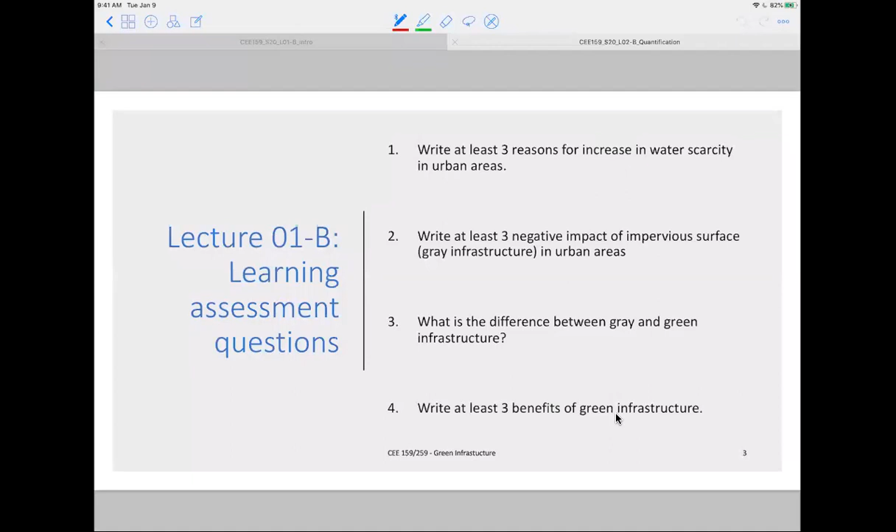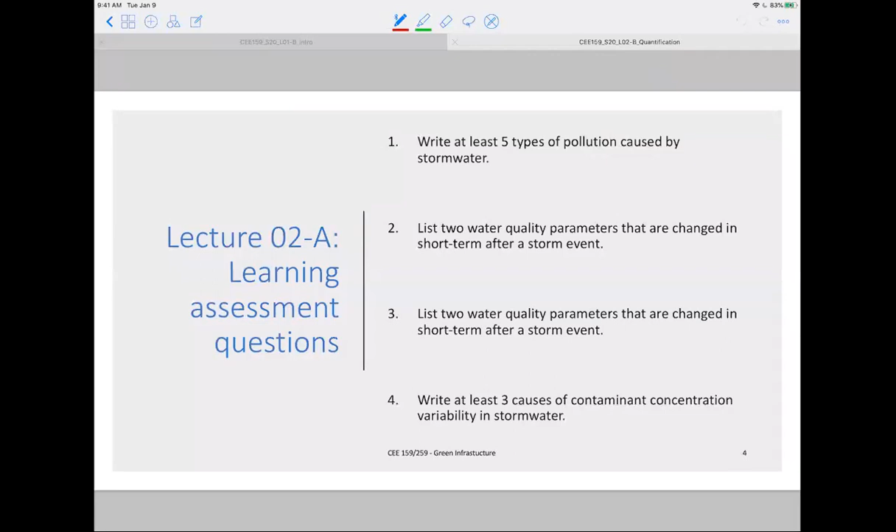So this is the objective of this particular hour of lectures. The first objective is about environmental regulations. Green infrastructures are designed because they have to be designed - if you give agencies a choice of whether to have green infrastructure or not, nobody will choose it because it costs extra money, even though it has a lot of positive impact. So many municipal agencies won't enforce green infrastructure unless there are regulations.

We'll learn about the different regulations that force municipalities or agencies to have green infrastructure in those regions. Then the next questions are all about consulting companies - if you start working, these are the questions they'll ask, the questions you should know. First, maybe in your first job, your task is to collect stormwater, so you should know how to collect stormwater.

You should know different side effects in the sense of what you should not do, what you should do when you collect stormwater samples. We'll learn that in these lectures.

Another part of stormwater monitoring is when you should take samples. What do you expect? At what time should the concentration be high? Concentration of contaminants in stormwater can vary very widely depending on whether you take samples at the beginning or end of storm events. The concentration can vary by orders of magnitude. So you should know at what point and location you should collect samples, and we'll learn that today.

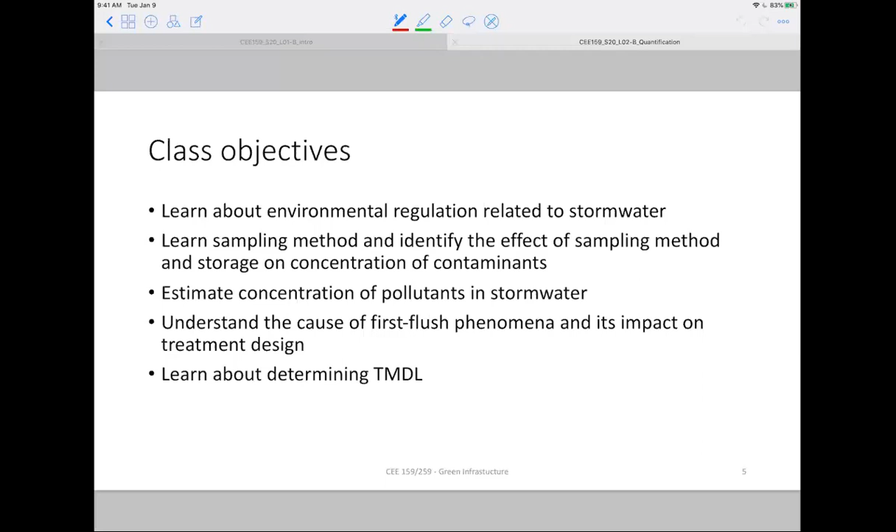These are the four questions you should think of when you listen to these lectures, and you should be able to answer them. First, what are the different regulations that affect stormwater management and how are they enforced? Who enforces those regulations—is it a federal agency, a state agency, or a local municipality? You should be able to answer that in a couple of slides.

Second, learn about sampling methods and handling, particularly what precautions you should take. The third is about the cause and importance of first flush phenomena. At the end, you have to measure the concentrations and how to quantify that—that quantitative part is the last question.

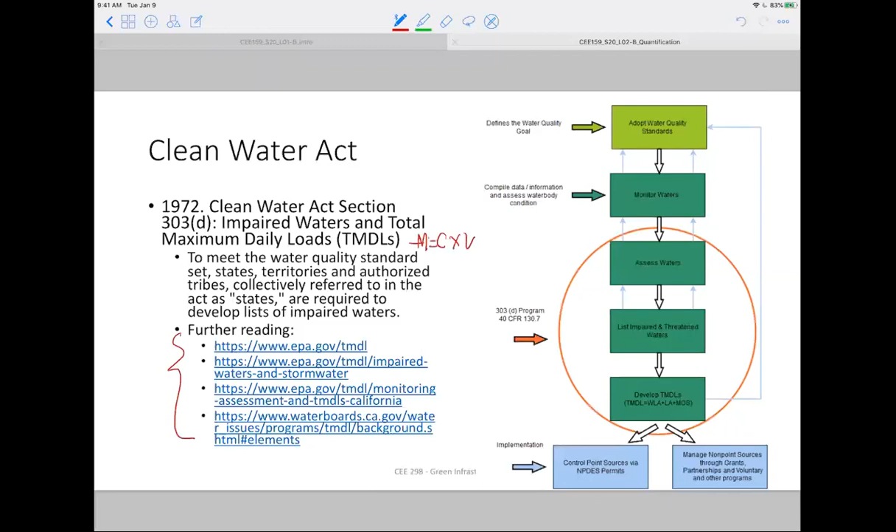Again, TMDL means what concentration is permitted. Even though it's a mass term, there is also a concentration term, based on acute toxicity—because if you discharge very quickly at very high concentration, that might be highly toxic to some aquatic organisms. So there is also a concentration term. But if you have a concentration problem, you can always dilute it and discharge it. There you are—that's the regulations.

The TMDL concentration varies based on water bodies because TMDL is related to the intended water use. For instance, if a lake is used for drinking water, the permit has to be more strict because the pollutant concentration has to be very small. But if that lake water is not used for drinking water, the TMDL will be much higher, meaning you're permitted to pollute a little bit more. So this TMDL is determined by end use; there is no single TMDL for every lake.

If you think of the LA River, there is a TMDL for it because those are based on what that water is being used for. That water is dumped into the bay that goes to the Los Angeles harbor, so those limits are based on the toxic effect in those regions. Same thing for a wetland, you will also have a different TMDL.

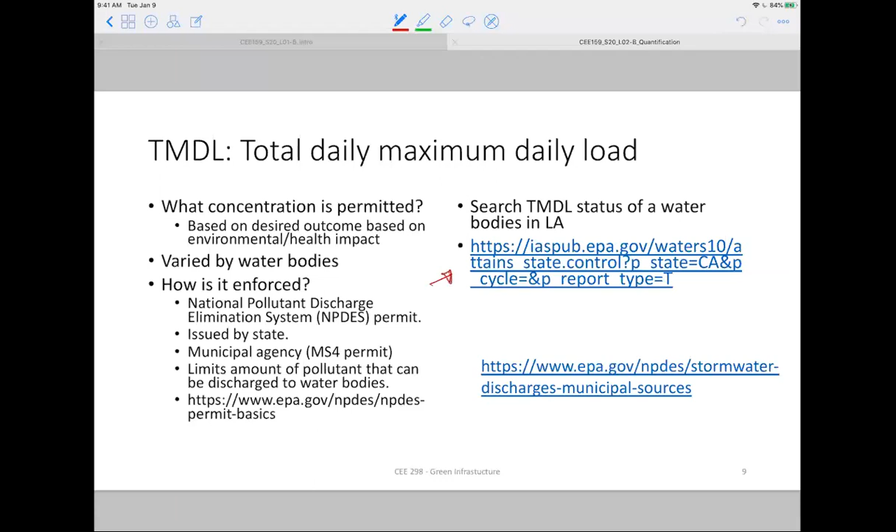And there are also local ordinances. For instance, LA has two stormwater ordinances, one from 1998, another from 2011. That's based on the low impact development ordinance, meaning which agencies should develop their property or include low impact development in their property.

For instance, think of buying a 4,000 square foot land and designing it a certain way. But when you design that, you might create lots of impervious surface that will pollute the river or water bodies. So the municipality or LA County can say you cannot keep the entire 4,000 square feet as impervious surface; you have to have some kind of green infrastructure to manage the stormwater on your property. That ordinance is based on the 2011 ordinance.

Again, we also have a stormwater ordinance from 1998. That's basically about how much discharge you can have from a particular site.

More recently, in 2018, this is very particular to LA County: Measure W, which is basically a tax system. That tax is called a parcel tax, meaning if you own a property with a certain amount of impervious surface, you pay a certain amount of tax per year, that's 2.5 cents per square foot of impervious surface per year.

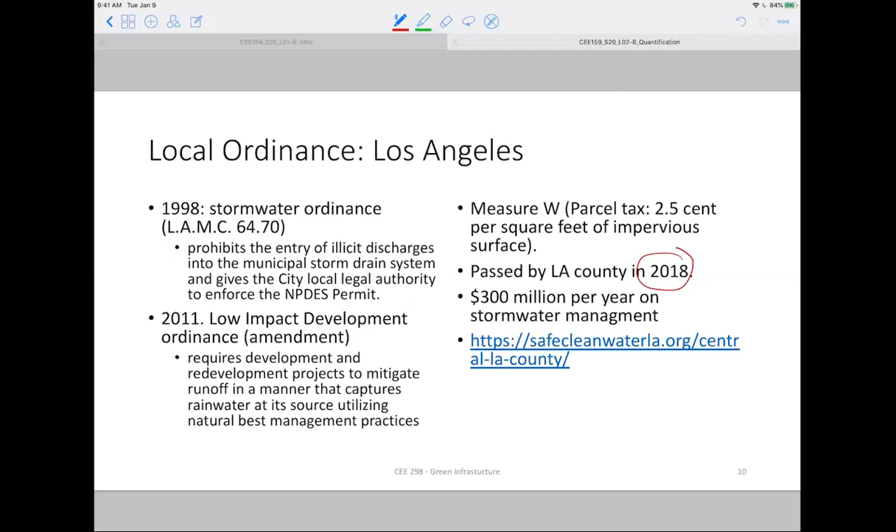Then there are many local regulations, as you see, I've provided some of the other ordinances.

Yes, I have a question. Yes.

So you said something about LA County having certain regulations and standards one needs to meet in terms of having pervious surfaces. So what's the minimum standard they need to meet? I guess in a way I'm trying to ask is if there's still a lot of runoff being generated during rains.

Are you asking about the volume or the concentration of pollutants? Just the volume, and also the kind of concentration of pollutants which have been established.

So I guess there is no minimum in the sense, because that's based on TMDL, where that stormwater is getting into.

There is a minimum drinking water quality standard. For instance, for drinking water or surface water, you need to have this much maximum concentration. Those are related to drinking water and enforced in a certain way under the Drinking Water Act, and those are also the same for stormwater.

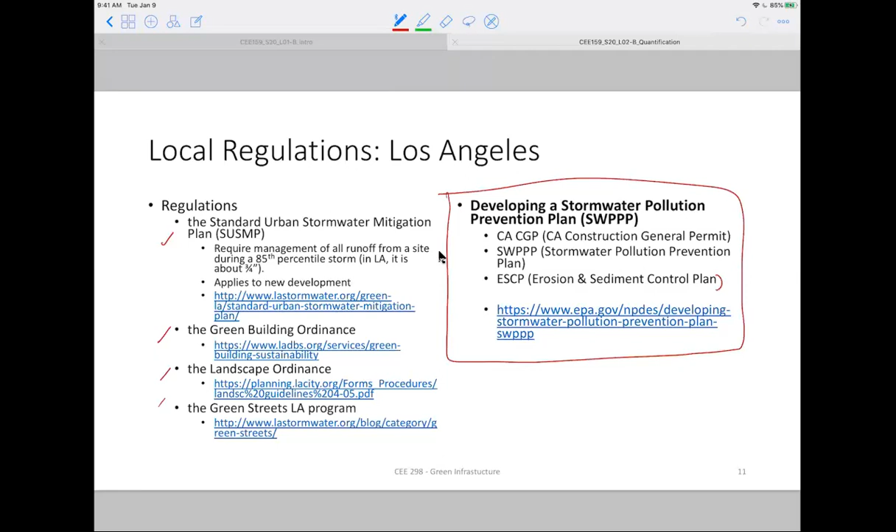The first thing in your job, imagine you got an engineering job in a stormwater consulting agency or industry. The first thing they will ask you is to go and collect stormwater samples at specific locations. There's a specific way you collect samples, and you have to make lots of decisions, which is what you're going to learn in a couple of slides.

When you're going for monitoring, you're looking for all these different pollutants — 8 pollutants I mentioned, but there are many other parameters you'll measure. So that means each parameter can be affected based on how you sample it.

For instance, think of sediments. To capture sediments, you take stormwater in a bucket and collect it, and keep it for, let's say, 2 days. You know that sediment can settle, which means if you sample from the top surface versus the bottom, you'll have very different concentrations.

That's why it's very important to know how you collect a sample, how it becomes representative, and how you store and analyze it. Monitoring is the first priority, because if you don't monitor, you don't know the problem. If you don't know the problem, you don't know what to design for, why you're designing these green infrastructures. There are many types of green infrastructure, and the design has to be very different based on what pollutants you are targeting to remove.

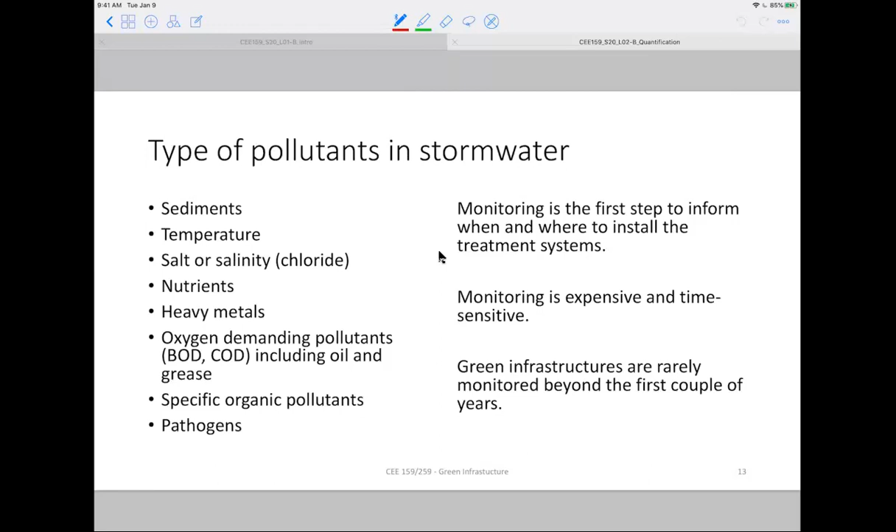I want to mention that concentration can vary widely. It's event-based, meaning based on what time, what kind of event — whether it's a 2-hour rainfall or a 1-hour rainfall, the concentration can vary. Even within the events, they can vary a lot, so it's very important to know what time you have to take samples. These are the challenges of concentration determination.

Challenges: first is unpredictability, meaning the concentration you expect at any time will vary widely. That means you don't know whether the sample you collected is representative of the actual concentration. It also depends on the local climate — if you have a very heavy rainfall, it will dilute a lot, meaning the concentration can vary quickly.

Again, concentration depends on the location. These pollutants accumulate on the surface for a period of time, so depending on where you collect the sample, the concentration can vary widely.

There are also many types of pollutants, and for each type there may be a specific strategy. For instance, if collecting for nutrients, what kind of sample container should you use? If collecting for pathogens and you use a sampler that already has pathogens, you're influencing the results. So how do you clean the sampler? All these factors influence these decisions.

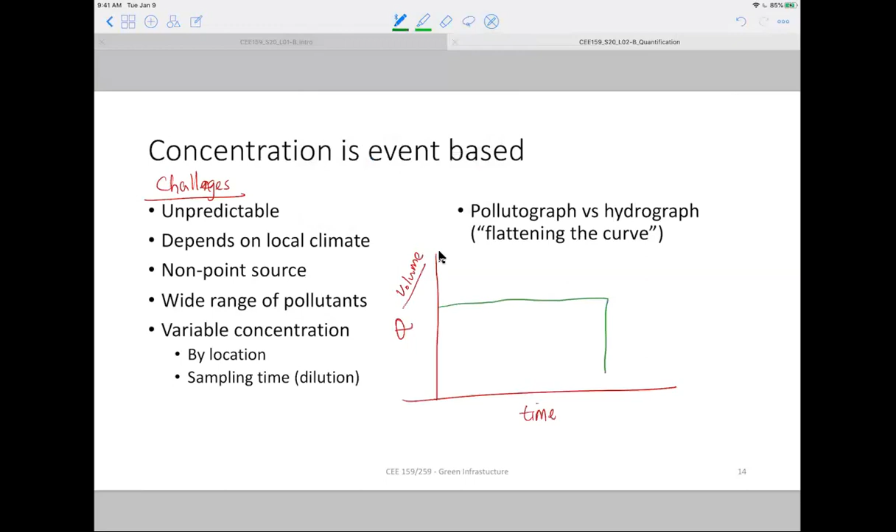This is time. Imagine the rainfall happens, and for simplicity I'll write the rainfall start and assume the same rainfall intensity until it stops. So this is rainfall intensity.

Now imagine this is the watershed, and you have rainfall here, all over at the same intensity, and you are collecting stormwater here—this is your sampling location. All that storm will drain into that particular location. It takes some time, so you can expect the discharge will initially be very small.

As it moves, it will continue to increase until the rainfall stops, and then it will start to decrease. It's not necessary that this coincides exactly with the peak discharge point—it depends on the size of the catchment area. But the point is, this is your peak discharge.

Imagine your pipeline and system are designed to hold this much water—this is the capacity of your municipal system to discharge stormwater. That means after this point, you will start having flooding. That's what we call the flattening curve.

That means if you have green infrastructure, you reduce that peak discharge. So this is without green infrastructure, but if you do it with green infrastructure, using a different line, this peak will be a lot less—so it will always be less than the capacity. This is with green infrastructure.

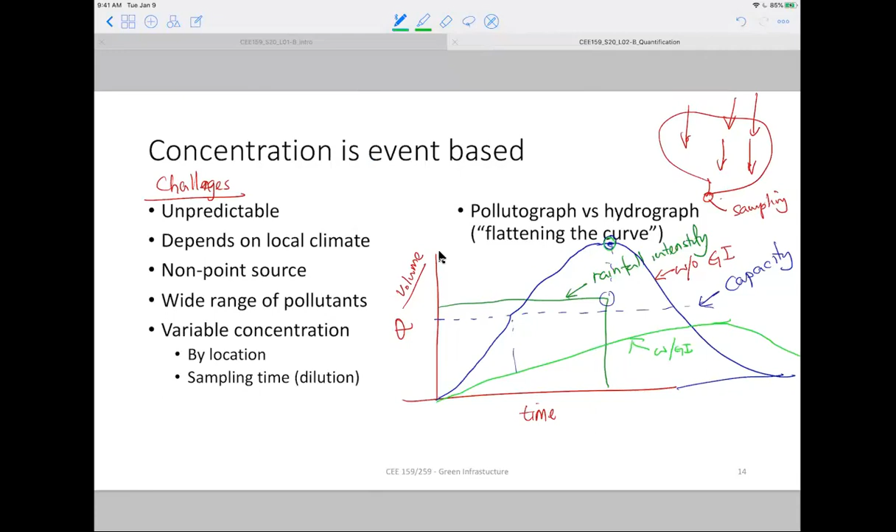There is no constant input of pollutants—it's all there to begin with, and everything can be washed off quickly. So you can expect that the water that comes very early is where you can expect very high pollutant concentrations. If you take water samples and start measuring concentration of pollutants, you might expect something like this.

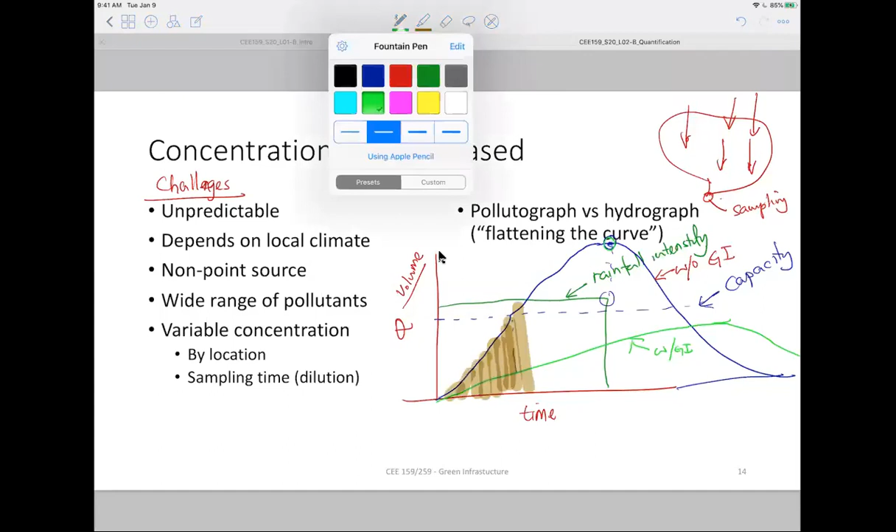We call this the pollutograph—the concentration of pollutant over time. And this is called the hydrograph, the amount of water discharged at a point over time, called that because it's related to the amount of water.

So there's one question: at what point do you expect high pollutant concentrations? You can expect that before the peak discharge—that's the quiz question, that could be one particular quiz question. What you learn here is that pollutant concentration always tends to come before the peak discharge point.

That concentration can vary based on what time you take the samples. If you take a sample at the very end of the rainfall and say it's representative, you under-predict the amount of pollutant discharged. If you take the sample at the very peak, you over-predict the amount of pollutant discharged. That's why, usually, you take multiple samples during storm events.

That's why whenever people say I take a grab sample and this is the concentration of contaminants, that's wrong. Grab samples do not represent the actual concentration. If you do take grab samples, you expect to take samples at multiple times and mix them all together to create composite samples.

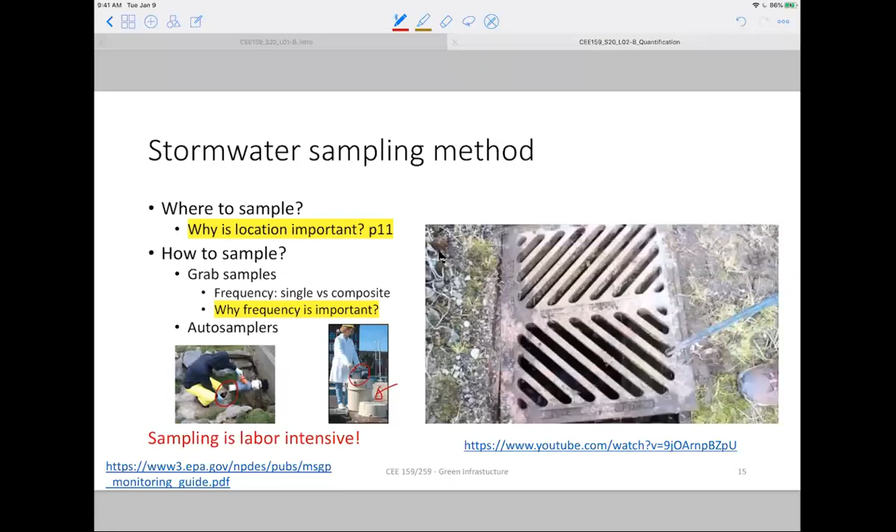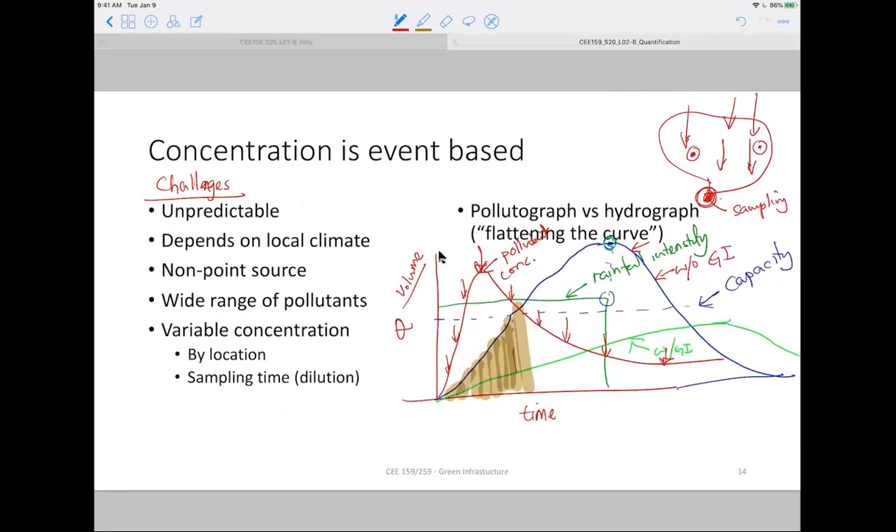The location also matters depending on where you collect. If you think of the entire stormwater system, you can collect at one catchment area. For instance, in the previous slide, if you collect water here, this is the catchment area, you are accounting for all the stormwater. But if you collect from here versus here, you are not really accounting for the entire catchment area. That's why it's very important to know at what site you should collect so you get a homogeneous mixture of all the stormwater.

Again, when to take samples, I already discussed this in detail, so I don't need to go over it again. The main point is that timing of sampling is very critical because it determines whether the sample has high or low concentration of contaminants. Usually the peak pollutant concentration precedes the peak of actual stormwater discharge.

By using green infrastructure, you can usually flatten the curve, meaning you can remove pollutants, and not only remove the pollutant, but also delay that peak. That's the whole reason why green infrastructures are designed.

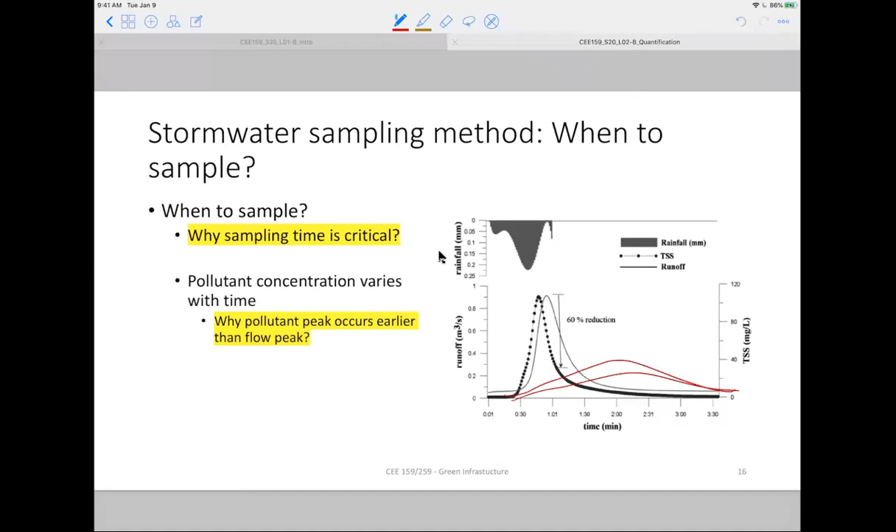Any questions? Yes, professor. Will this lead to contamination of groundwater in any way?

Yes, if you use green infrastructure. Yes or no, in the sense that it depends on the type of green infrastructure. In Los Angeles, the most common green infrastructure is a dry well, meaning you just create a big hole and dump all the stormwater into it. That means you are creating a short circuit allowing pollutants to get into groundwater, so yes, at that point it will increase groundwater pollution. But they do that in coastal areas because that groundwater is not used for drinking water, so you can do that there.

But if you have a location where groundwater is used for drinking water, you cannot use certain types of green infrastructure. But there are many other types of green infrastructure that can remove pollutants and diminish contaminant transport to groundwater, and we'll learn all those techniques.

Right, thank you. So one question was, what is the first flush phenomena? Again, first flush phenomena is the fact that most of the pollutants come early in the rainfall. That's why it's called the first flush phenomena.

If you see in this graph, particularly here, this is a study done by Professor Mike Stenstrom. He's at UCLA and has done a lot of work on stormwater in the early 2000s, and this is one of his papers. As you can see, at the top here, that's rainfall, and at the very bottom, that's runoff, and the very bottom axis is time.

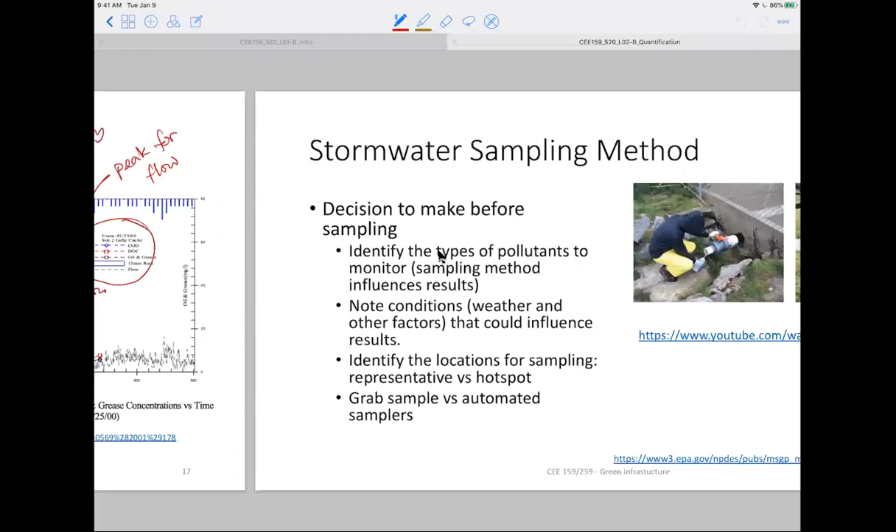Again, we discussed how to sample. You have a choice of grab sample versus automated sampler. If we have a choice, we should always use an auto sampler. But an auto sampler costs about $10,000 a unit, so it will be very expensive. It has benefits, but it's highly expensive. You have to secure it and make sure nobody steals it. That's why it is very important to use those properly.

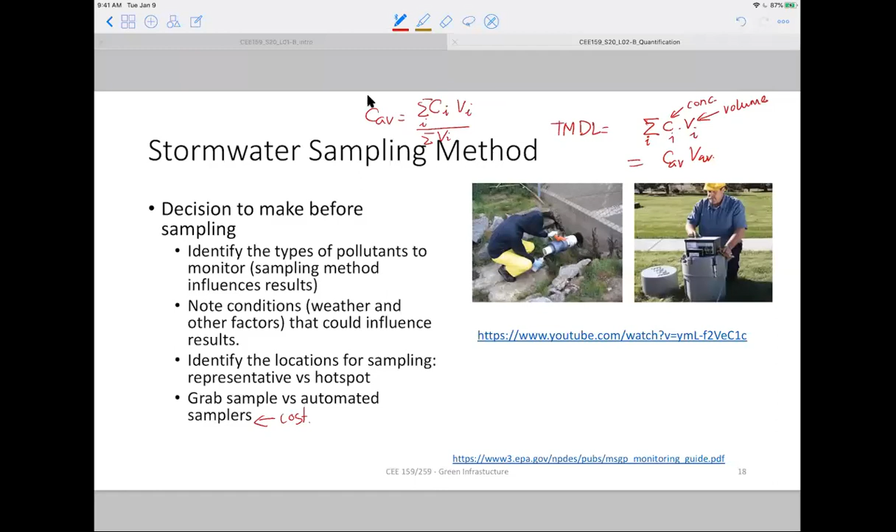Okay, so again, these are the decisions you have to make: what type of pollutants you are going to sample, where you are going to collect samples, when you should collect samples, and whether you should use grab samples or automated samplers. Again, that's mostly based on cost - this is not really a choice. If you don't have the cost, say $10,000 to install at that location, you are not going to use an auto sampler.

Sample handling is important because it influences the concentration of pollutants. As I said, if you are using a grab sample, you should ensure that the sampler or container has no pollutants in it already. You have to clean it, and how you clean it depends on what type of pollutants you have.

For instance, heavy metals - you never collect heavy metal samples in a sampler or container which is metal. That's common sense, so usually plastic bottles are used. Take plastic bottles, put acid in them so you can wash it - the acid dissolves any residual heavy metals in that plastic container.

Then you pre-wash that particular container in the stormwater. So what you do is take the acid-washed sampler, take some sample and pour it back in - that way you wash out any residual acid inside it. Then you do that multiple times, rinsing with the same stormwater, and then you collect that water.

For organic pollutants, you typically use a glass container because if you use plastic, it might absorb some of the organics - that's why you use glass. For pathogens, it doesn't really matter, but you have to disinfect before using, with methanol, and clean it very well. As soon as you collect the sample, you have to store it at 4 degrees Celsius so the pathogens don't grow or decay. So these are a couple of things to remember about how to change your approach based on the types of pollutants.

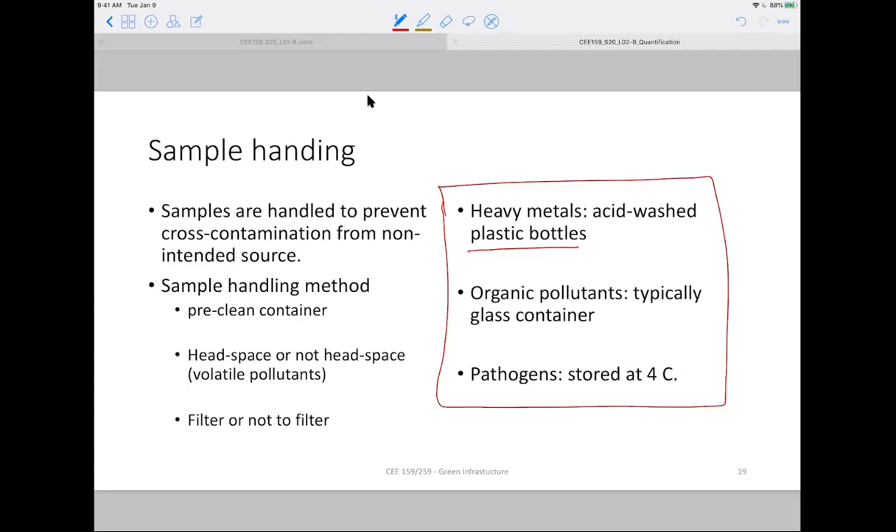Again, the storage also depends. Most of the time people store in an ice cooler. The reason is that if there is any pathogens or any organics, they will not be decomposed by the microorganisms in the system. So you never go wrong by putting it in the 4 degree cooler. But if you don't have a cooler, immediately ship it as soon as possible and store it in the refrigerator. The reason we put it in a cooler is to slow down the microbial decomposition, nothing else.

So how do you handle the storage? You know that you can measure immediately, but many labs are not open all the time, so you can store that sample for analysis for the next day or another time. That storage is important, and the whole reason how to store is because you don't want the contaminant concentration to change during storage. For instance, nutrients.

Nutrients - if you have lots of nutrients, nitrogen and phosphorus, any kind of microorganism present in your stormwater, and you have lots of them, they will start eating those nutrients. That means next time you measure it, it will not be the same concentration. So to ensure that your concentration is consistent, you have to remove those microorganisms. That means you have to filter it or you have to acidify it.

If you acidify it, add just a small quantity of highly acidic strong acid - in this case hydrochloric acid, HCl - so that the pH is around 1 or lower. If you have low pH, no microbe will survive, meaning they are not going to eat those nutrients.

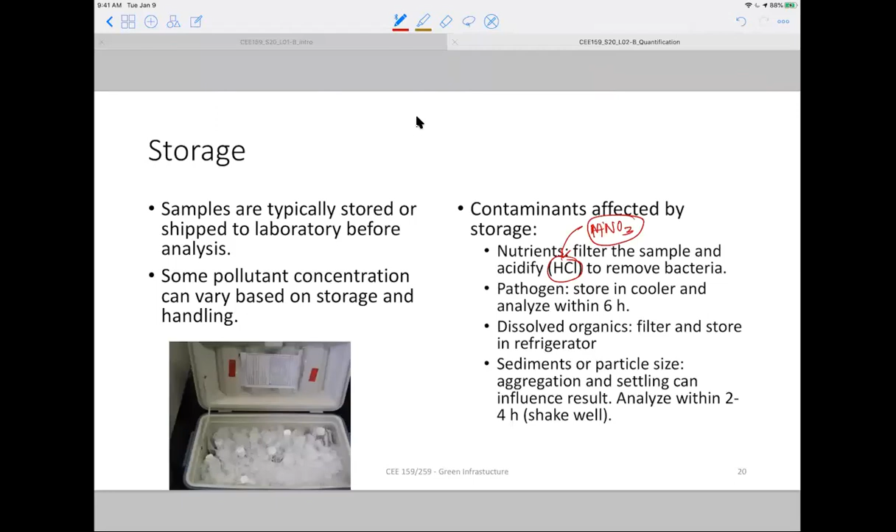So this is all that you have to think of. Again, how do you quantify total concentration? It's a very simple equation - we discussed this here. It's called event mean concentration.

This means if you are collecting samples during this storm event, this is the concentration of pollutants, based on the many samples you collected during the storm event. So let's say you collected n number of samples. N is the number of samples you collected. And for each sample, there is a concentration - that's Ci. This is the concentration, it's written here.

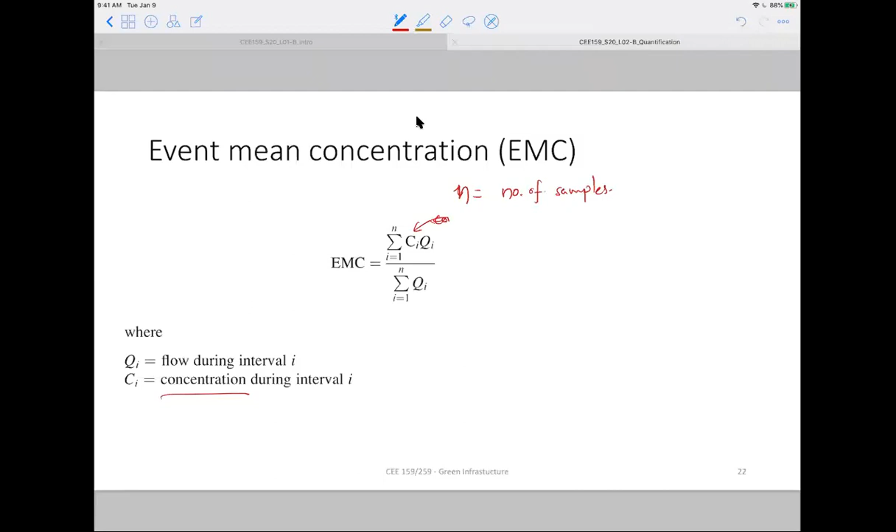And Q is the discharge, flow discharge. You also measure the flow rate at that particular sampling location, and this is related to discharge - meaning you are measuring flow rate at that pipe or river or any stream. So you multiply those to get an amount of mass in that particular time. If you sum them together, you get the total amount of mass. And you divide that by the total volume of discharge, you will get the concentration.

So this is total mass discharged per unit time. This is total volume discharged.

So there is a question from Arusi: Are samples taken over the duration of the storm events, or over the spatial extent of the storm event?

These are samples taken at different times, and the location is one location.

You have one more question? No, actually not any questions.

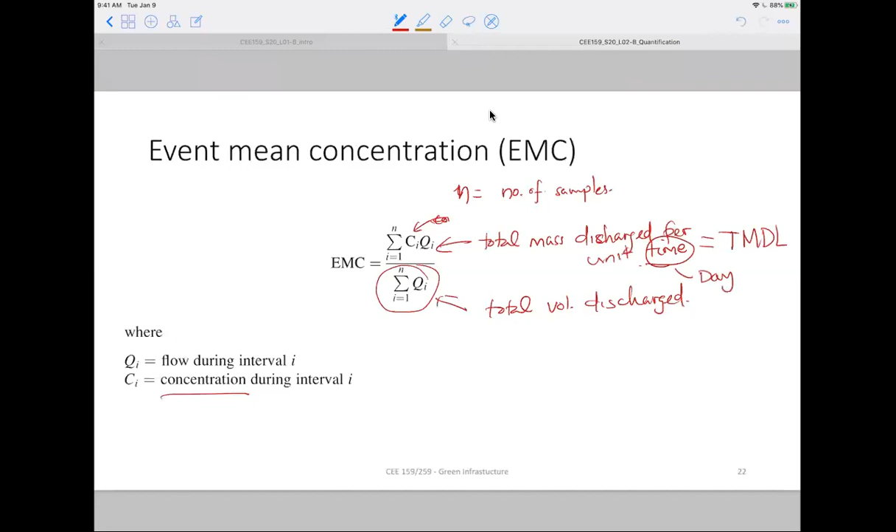So again, this is the concentration. If you think of this term, it can be TMDL. If you think that time is a day, this whole mass will be TMDL. So the next slide is all about TMDL. TMDL is the total amount of pollutant discharged at any time.

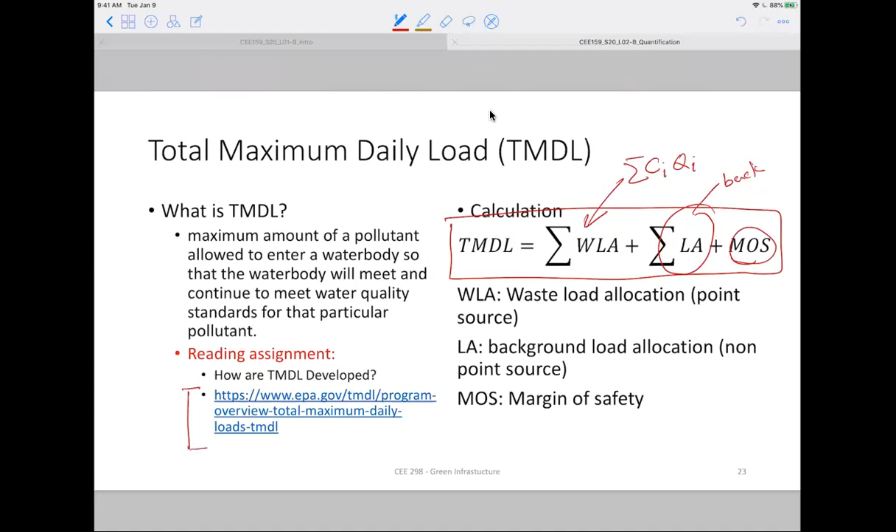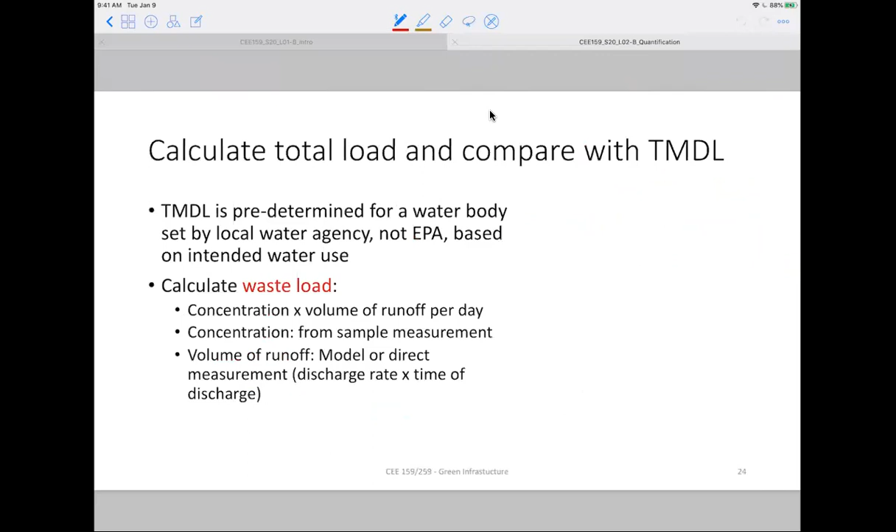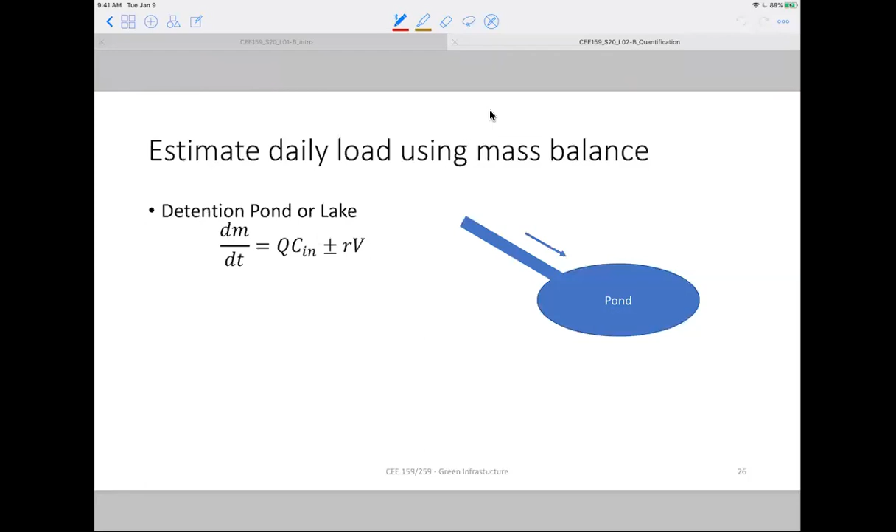So we discussed how you measure the TMDL, basically concentration times volume. I will not read through the other slides; this is a different equation you can use to determine the total amount of mass. I will derive those after this class so you know how to use them for examples, so you have a final form for different types of water bodies that you can use to measure the total mass loading for the system.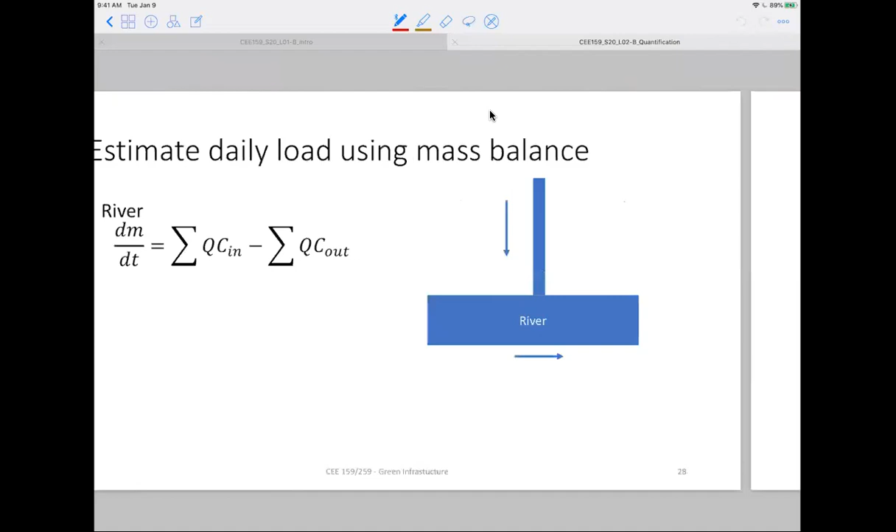Again, these are mass balance, which you already learned in CE153. Anybody who didn't take CE153 can learn or relearn it here, but I'm going to record it later so you can watch it another time. This is another example we'll use to solve, based on the equation you derive. Again, this is all in CE153, so we don't need to redo it.

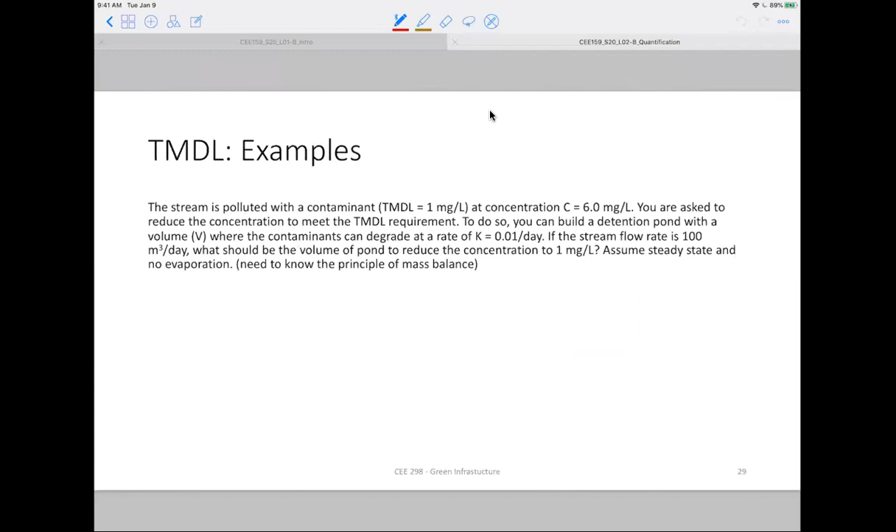So that's exactly 1 hour, and that's the end of today's class. Hopefully you'll be able to answer those 4 questions from the beginning. Let's go back to that question. I didn't have it here... no, actually I have it somewhere. All right, so these are the 4 questions you should answer.

What are the different regulations that affect stormwater management? Clean Water Act, and there are many local regulations. You should be able to tell those, but I'm not expecting you to remember that for a quiz or midterm.

Learn the sampling method and handling. This is very important, you should know what pollutants are affected by different methods of handling and sampling.

Learn the cause and importance of the first flush phenomena. The cause is because most of the pollutant washes off initially. Why is it important? Because you can actually treat that to meet the regulation limit, so your green infrastructure has to be designed a certain way to capture that first flush. We'll learn how it is done.

And quantify event mean concentration and total maximum daily load. You didn't know this one, at least not in a quantitative way. I'm going to record that so you learn it.